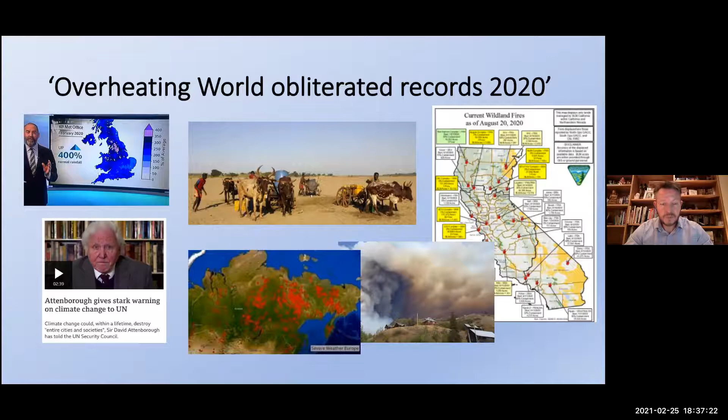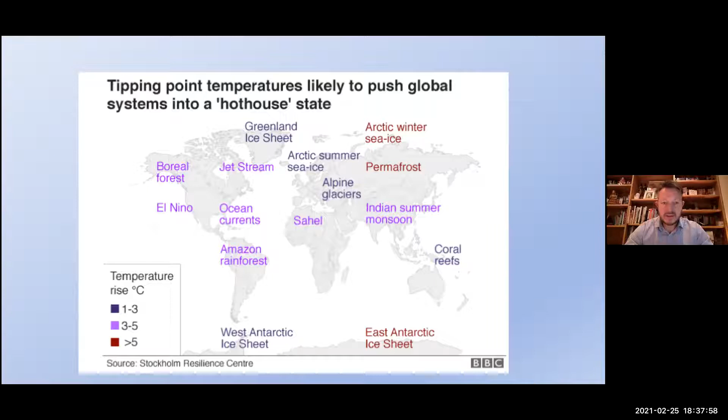The Blue Ocean event is an ice-free Arctic. In 2020, we had NOAA, the National Oceanic and Atmospheric Administration, produce a report. It's got about 7,000 scientists working for it, based in the US, funded by the US government. Their report brought forward the melting of the Arctic sea ice from 2050, 2060 to 2034 or earlier.

So the models are predicting most likely to see by 2034 that the Arctic sea ice during the summer will be gone. The Arctic sea ice reflects a vast amount of solar energy into space every year. Now, if we have a blue ocean event, it's going to be dark and it's actually going to start absorbing solar irradiance and increasing the temperature of the seawater. The knock-on effect is the Arctic is already 4 degrees warmer than the rest of the world.

It's going to affect the jet stream. We've already seen just recently the record temperatures in Texas with the polar vortex moving down from the Arctic over North America. So we're going to see more of that, and we're going to see ridges and troughs. That means the likes of Ireland, the UK, British Isles could be locked into one summer of excessive rain, and then the next summer excessive drought.

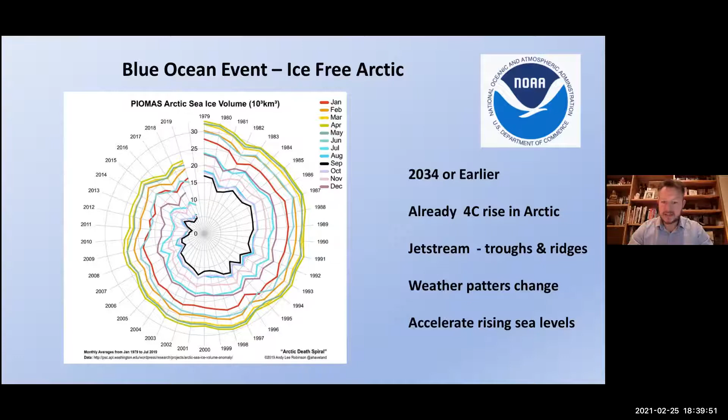So what's causing climate change? Well, we hear a lot about greenhouse gases. So greenhouse gases are predominantly from fossil fuels: coal, oil, gas, and peat. We also have some man-made greenhouse gases, the CFCs, and we've also got CH4, which is methane. We've also got greenhouse gases coming from the use of agriculture, and more recently the destruction of forests and soils is releasing greenhouse gases into the atmosphere.

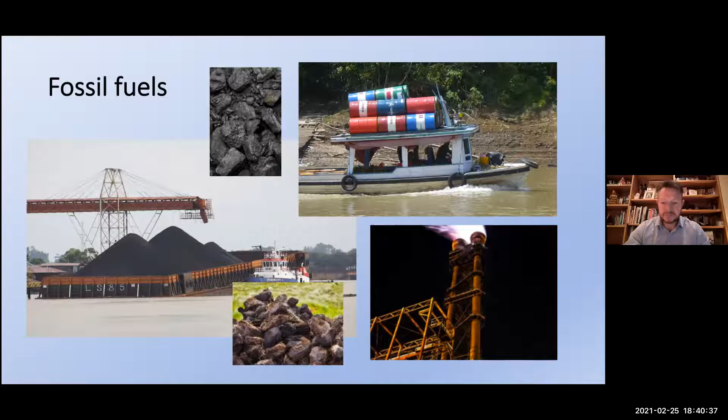So every year we burn billions and billions of tons of coal, oil, gas, and also produce vast amounts of cement, which produces greenhouse gases. The common term that we use is CO2, which is carbon dioxide, but the actual term for greenhouse gases is referred to as CO2e, carbon dioxide equivalent. So just for the simplicity of this talk, we'll talk in terms of carbon.

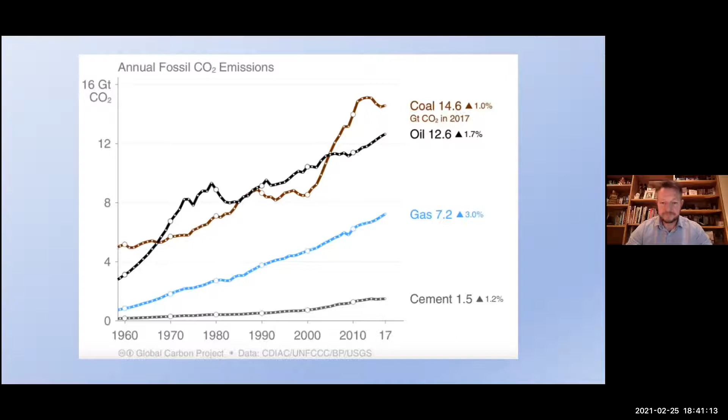So we've got the Intergovernmental Panel on Climate Change, the IPCC. They produce these reports that monitor greenhouse gases and the state of the climate. And this year we're having COP26, which is the global UN negotiations on climate change, where all the countries of the world come together and discuss setting targets for limiting greenhouse gases.

The most up-to-date scientific evidence produced by the IPCC is that we need to keep global warming below 1.5 degrees Celsius. Otherwise we're going to have more droughts, famines, wars - the list goes on. I'm not going to go into too much on what the outcome is going to be, but needless to say, it's what we need to aim for.

This year, this decade, is the last decade that we can actually put our targets in place, because once we emit CO2 into the atmosphere, it will stay up there for a very long time and keep on having the actual effect of global warming.

As the IPCC said, we need to rapidly transition the energy, the land, urban and infrastructure, including transport and buildings, and the industrial systems that we have - and we need to do that now.

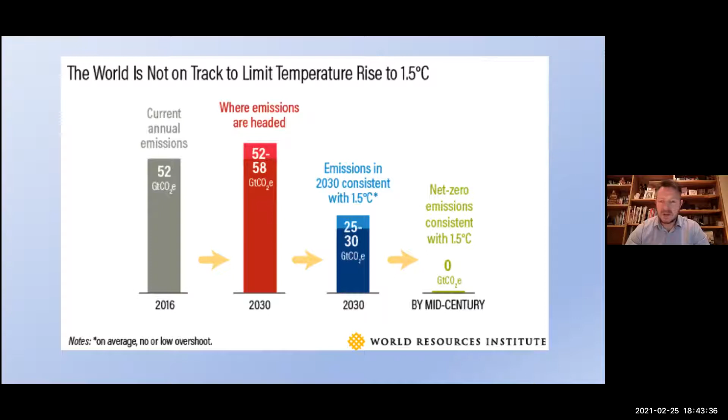So we need to rapidly transition to renewable or sustainable energy. At this moment in time, of all the energy consumed in the world, 85% is from fossil fuels, and only 15% is from renewables and nuclear - those are the latest figures, from 2017. This just shows you the pathway we need to go: we need to get this figure from 15% renewable and nuclear to 100%, and we need to do that rapidly.

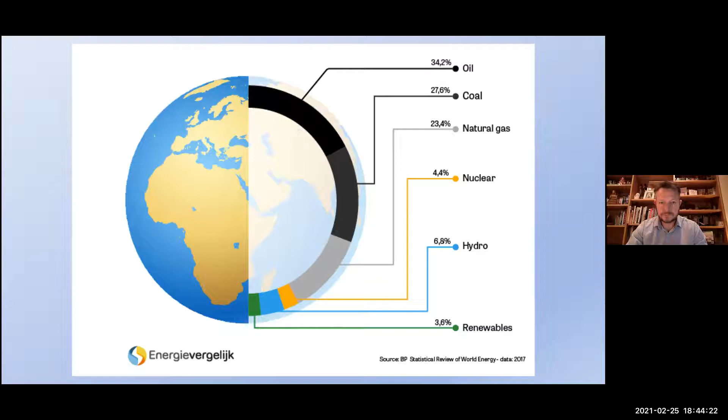The good news is that we've got a vast amount of renewable potential energy given to us every single day by the sun. The main types of renewable energy are solar energy; we've also got gravitational energy from the moon, from the tides; and we've got deep geothermal, the actual heat of the earth. The sun itself gives us enough energy to power the world in one hour - if we could just harvest that energy in one hour, we could power the whole world for a year.

Collectively, renewable energy sources can power the world over 3,000 times if we can just harness it. Solar alone is nearly 3,000 times. Wind, if we could harness wind energy, is 200 times the amount of energy that we need.

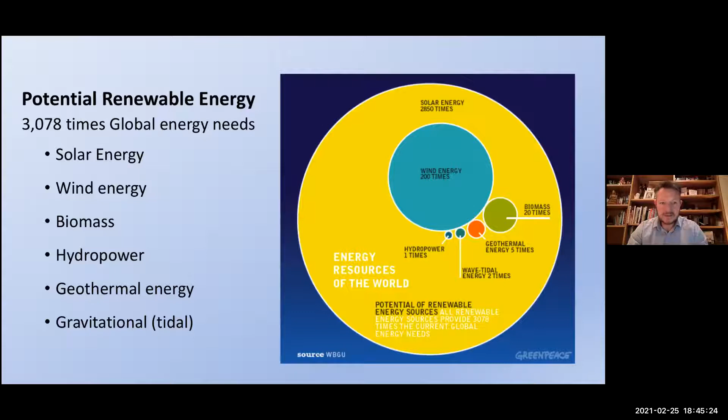Each form of energy generator that we have emits carbon dioxide. I'll give you an example here: the amount of CO2 produced to generate 1 gigawatt hour of electricity. Let's say, pick coal - 888 tons of CO2 is produced per gigawatt hour. Compare that to a wind turbine, which is just 26 tons.

So what we need to do is rapidly switch and stop burning coal, oil, gas - any hydrocarbons - and switch to renewable forms: hydro, wind, biomass, nuclear, solar PV.

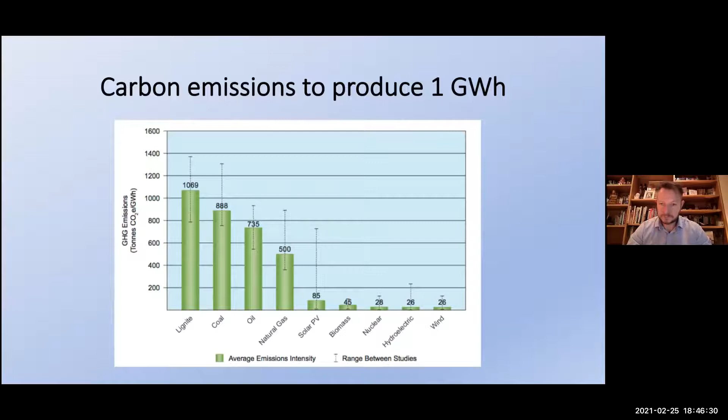On learning about all this, it was, I believe, 2005 - yeah, 2005 - I was part of Friends of the Earth, and they had this campaign called the Big Ask Campaign, which led to the Climate Change Act. They were going around all the politicians highlighting the fact of the ecological climate emergency. And by then, the world had already been reporting on this.

We had quite a few different COP meetings, and then the UK government, I think it was Gordon Brown was leading on it, took this very seriously, and the Climate Change Bill became the Climate Change Act in 2008.

I was very inspired by this, and I gave up my job as a surveyor and started working in renewable energy. I quickly discovered that the people I was working with had no idea how to install heat pumps. So I went back and completed a master's in renewable energy, and set up a company installing solar photovoltaic and also heat pumps.

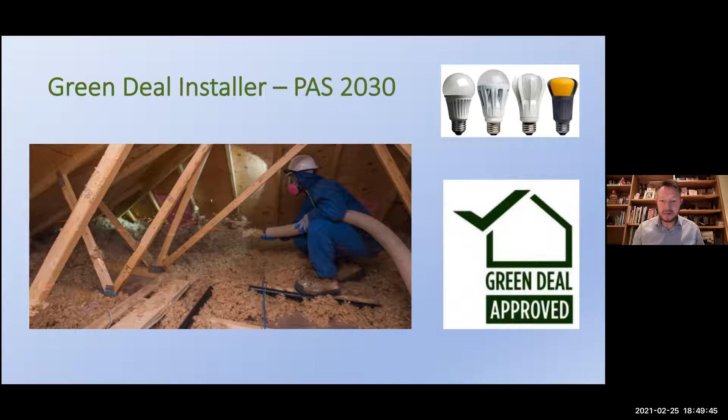This is the way forward. This is what needs to be done. In the UK, we've got 21 million properties that need to be retrofitted in the next 20 years - about 25,000 properties a week. A phenomenal amount of work. Then disaster strikes.

Change of government in 2015. There was a coalition government, and then the Tories got power. One of the policies they decided to look into was all the green policies. And they systematically went and scrapped onshore wind. It meant if you wanted to install a wind turbine, you could not get planning permission for onshore wind anymore. They got rid of the feed-in tariffs for solar, destroying the solar industry.

There was a green home scheme for energy efficiency, which they scrapped. They moved the target for zero carbon homes, which was supposed to be 2016, 2018 - they got rid of that. They sold off the Green Investment Bank, and several other things - it was a period of time that was completely...

It was just absolutely heartbreaking. I saw people I'd studied with, done my master's with, some brilliant minds who no longer had jobs - people working in wind. One colleague's now gone to California to work. Another colleague was working on wind and wave technology in the Scottish Islands - they had their R&D grant funds pulled. He's now working in Sweden. So there was this big brain drain that happened.

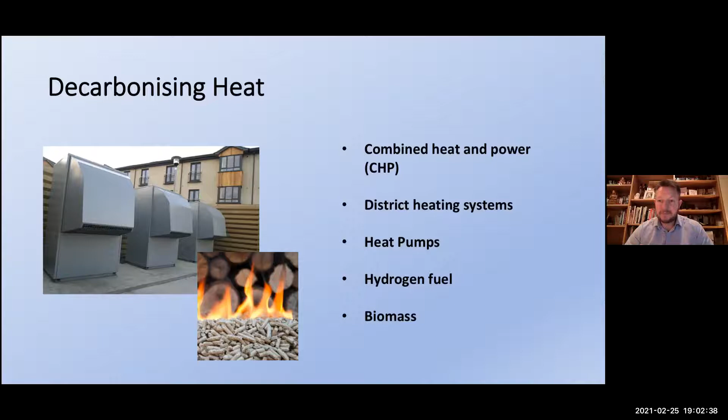Then we've got hydrogen fuels - excess energy from wind turbines and solar power plants can be used to produce green hydrogen fuel, which we can store, and then release later for electrical energy or for heating houses. We've also got biomass, which depending on the type can be good. If it's the wrong type - too wet, without the proper fuel and scrubbers in place - it can contribute to excess air particles, and they're banned in a lot of places.

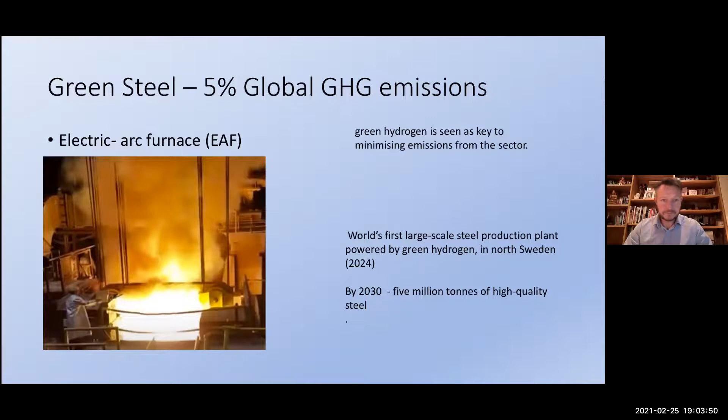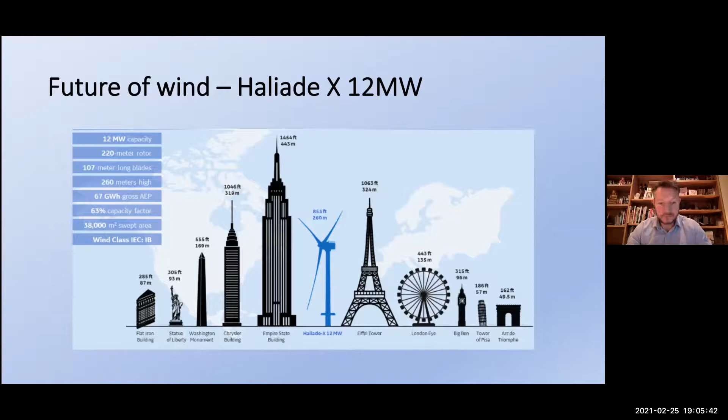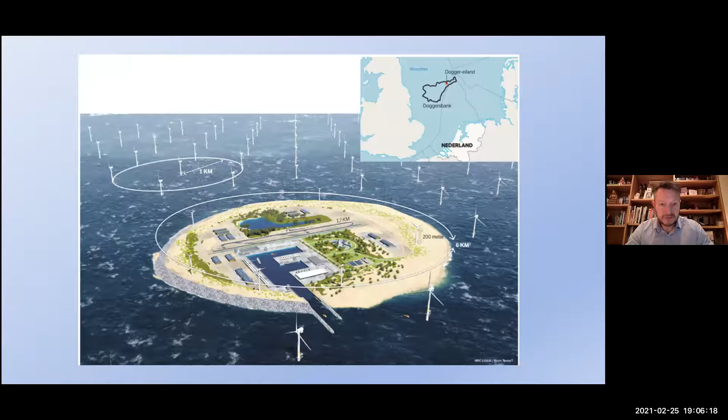And my industry, solar, is extremely versatile. It took off in the 1950s really by NASA using it for the space program. But also we've got nearly 1 billion people in the world who've got no access to grid electricity.

And solar now is providing microgrids. So you can put solar anywhere. The price of solar is tumbling, the install price is coming down.

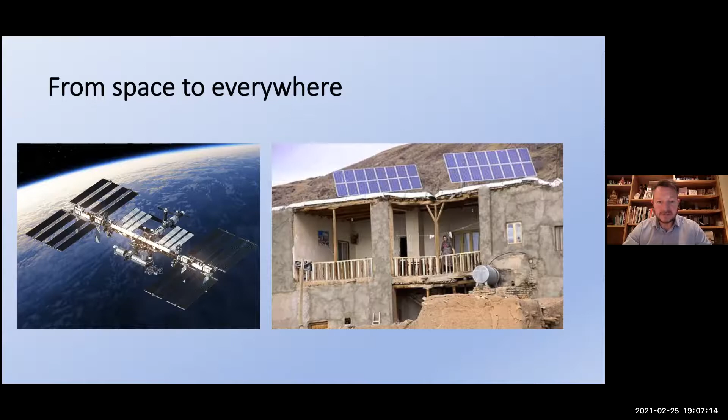In the last 30 years, the price of a solar cell is 99.99% cheaper, and it takes a while to get your head around that figure. But the first solar panels were costing millions, and now it's the cheapest form of energy in the world. It's also, the main ingredient is Si, which is sand, the second most abundant substance in the world.

It's extremely versatile. We're seeing now solar-powered cars. They can be used in different ways, for concentrated solar power.

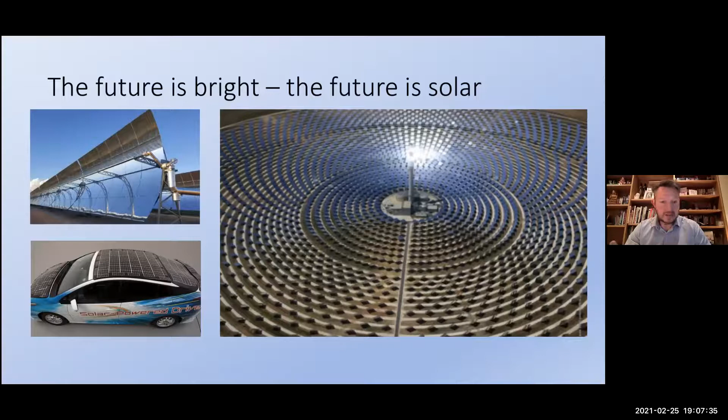And also now we've got agri-photovoltaics, which is combining producing energy and farming, where you can grow certain types of plants that actually like shade, and by putting solar panels over them, you get two uses out of the land.

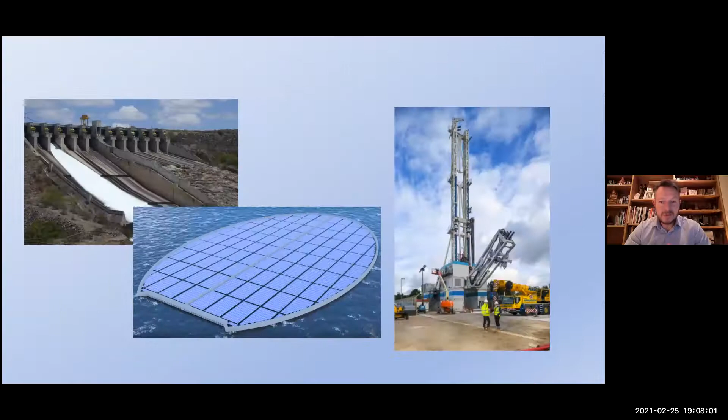So moving into the future, we now have deep geothermal starting to be used a lot more. It's digging 4 or 5 kilometers into the ground and pumping water down to heat turbines for generating electricity. So in certain areas in the world, it works really well.

We've also got tidal energy. We've got floating solar panels that you can put over hydro plants.

And the future, well, to tie in all the renewable energy, what we've got is, wind and solar is intermittent. The sun doesn't always shine and the wind doesn't always blow. And it's the most common argument against renewable energy, the intermittency.

But if you have interconnectors going from here to Denmark, which we do, often we've got them going from Ireland to the UK to Denmark, we're hooking up the North Sea, and soon we'll have large DC cables going the whole way down to Spain and Portugal.

And by doing that, you stop the intermittency, because somewhere the sun is going to be shining, the wind is going to be blowing. And you combine that with smart grid technology to monitor how much energy is going onto the grid, and also for charging electric vehicles.

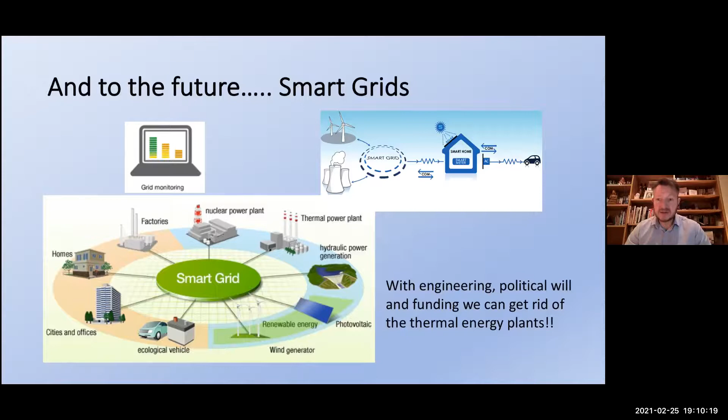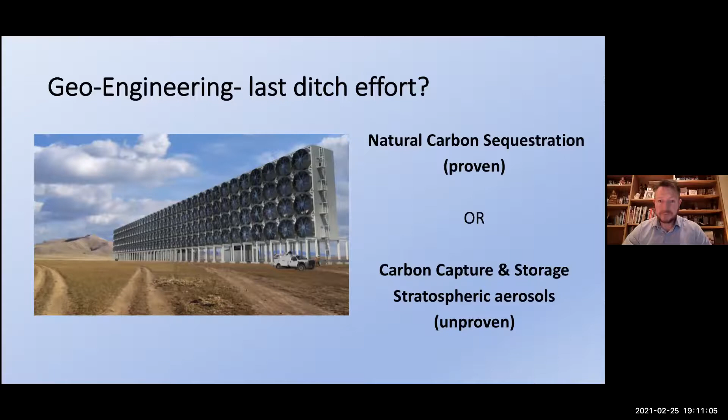In the Apollo space mission, Apollo 13, they were due to land on the moon, and they had an accident - one of the oxygen tanks in the spaceship exploded or leaked. It took them a while to figure out what was going on, so they had to abort the mission. What followed in the next couple of days was one of the greatest modern engineering feats. The astronauts, trained engineers, and people back in Houston went through everything on board the spaceship to figure out what was needed to survive and get them back safely. That meant switching off the heating where they were sleeping in sub-zero temperatures, minimizing exertion so they didn't breathe as much oxygen, right down to rationing food. And they did it - we've now seen blockbuster movies made about it. So the question is, who's going to rise up to the challenge and have movies made about engineers in the future?